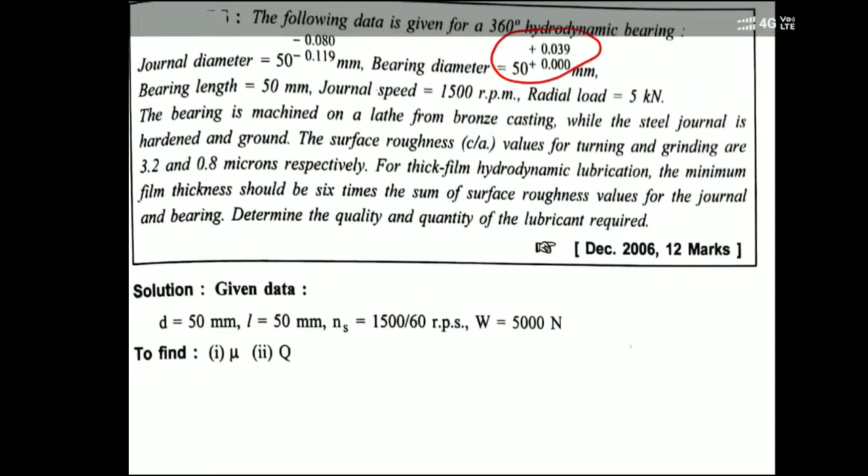First I need to find the radial clearance. Why? Because they have given the diameters of the bearing and of the journal. Capital D is for bearing, small d is for journal. I took the average of the upper and lower limit. For the bearing, upper limit 50 plus 0.039, plus 50 plus 0, the lower limit, divided by 2. This answer will be 50 point something.

Now the average diameter of the journal, that is shaft: 50 minus, you can see the upper limit is 0.080. I put it here and I'll get 49 point something. This diameter conversion is very important, because the clearance is nothing but capital R minus small r. R is not given; we have the diameters. You can convert the diameters to radii, or take D minus d divided by 2. It gives the radial clearance 0.059 mm. This is the first step.

Second, find the minimum oil film thickness. For thick film hydrodynamic lubrication, the minimum film thickness should be 6 times the surface roughness value. The two surface roughness values are 3.2 and 0.8. So h0 is equal to 6 times 3.2 plus 0.8, in microns. The answer is 24 microns, converted into mm by multiplying by 10 raised to minus 3.

We need h0 by C, because that parameter is indicated in the chart. C is known and h0 we have calculated, so here we are going to calculate the h0 by C term.

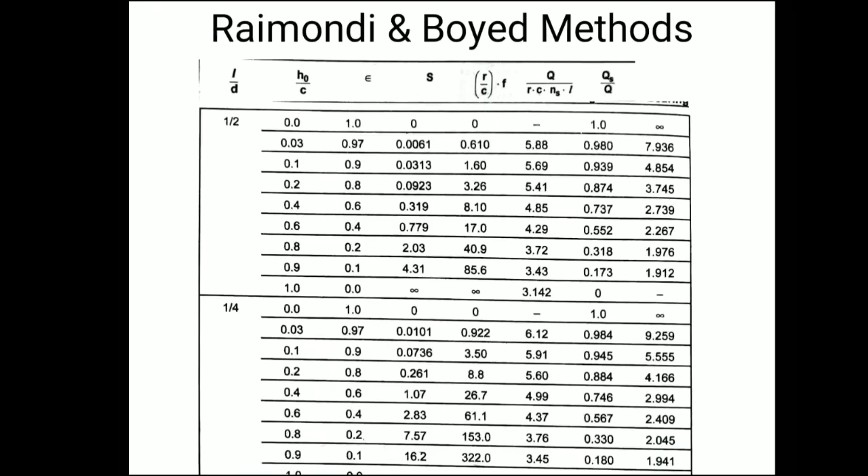Now you can get h0 by C: 24 into 10 raised to minus 3 divided by C, the clearance. It will give you 0.4, correct? 0.4. Go to the chart of the Raimondi and Boyd method. First of all, I must know the L by D ratio. So I will have to check the L by D ratio. It is 50, diameter is 50.

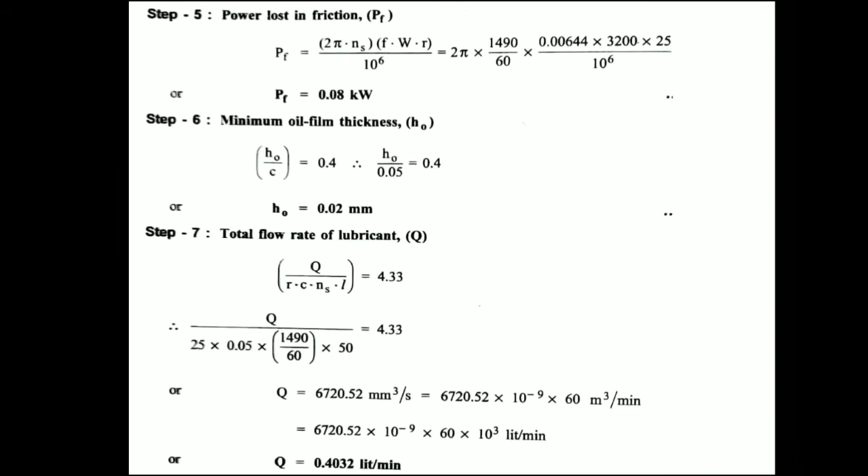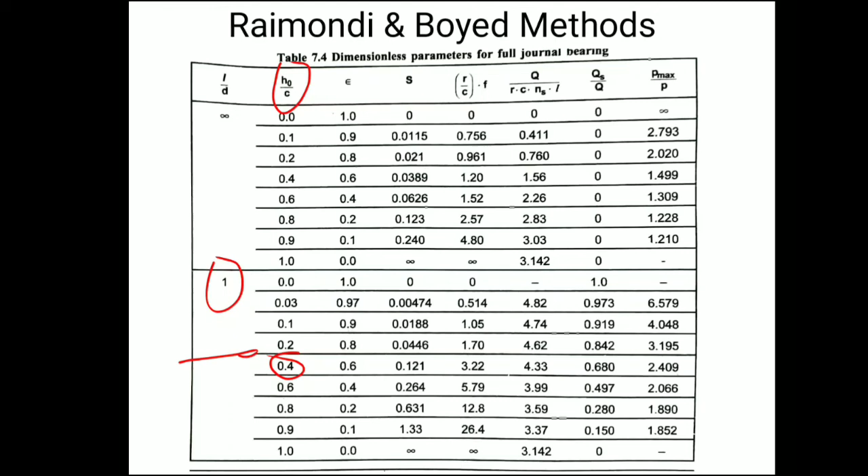I got the chart row which is required for solving the numerical. So this row you copy as it is. So I'll write here. Did you get it? Okay, see, I copied this row. L by D how much, h0 by C how much, bearing characteristic number, then the flow variable, pressure and flow rate. Correct? So that row I copied. So this selection is very important.

In the previous numerical, we selected this from the bearing characteristic number. But right now the given data is related to oil film thickness, so according to oil film thickness, I have chosen the row. Is that clear? So I'll use one by one what they are asking. They are interested in the quality of the lubricant, that is viscosity. So viscosity is in which parameter equation? Of course, the bearing characteristic, that is the Sommerfeld number. Here mu is there. Correct?

So I use S is equal to (R by C) square into mu NS by P. Correct? So mu is not known. But I can calculate pressure on projected area, that is P is equal to W divided by L into D. W, the radial load, is known, L into D known. So it will give you 2 newton per mm square. So I can put this value. S value will be the Sommerfeld number; you can check from the diagram. For 0.4, S value is 0.121.

So I took here 0.121 is equal to (R by C) square into mu into speed. I will have to take it in RPS, revolutions per second, divided by the pressure. This will be the 2. So from this I'll get the viscosity. It is in newton second per mm square. I know that if viscosity is in 10 raised to minus 9 terms, I can convert it to centipoise. So I told you the conversion. Therefore the viscosity is 54.83 centipoise. Is that clear? So this will be step number 5.

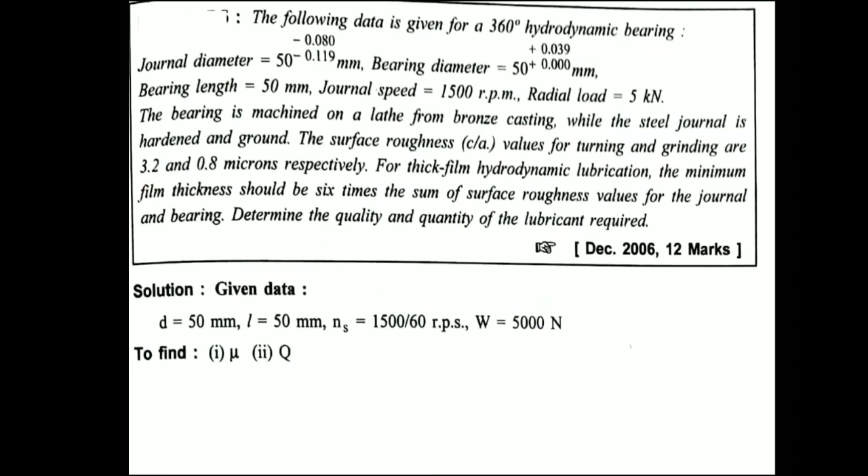Quantity. Now quantity is nothing but Q, the flow rate in liters per minute. So that we need to calculate. We know Q by RCNsL. Q is situated here. So Q by RCNsL is equal to 4.33. So I will have to mention here 4.33, and I put all the values which we have calculated. Here do remember that Ns should be in RPS.

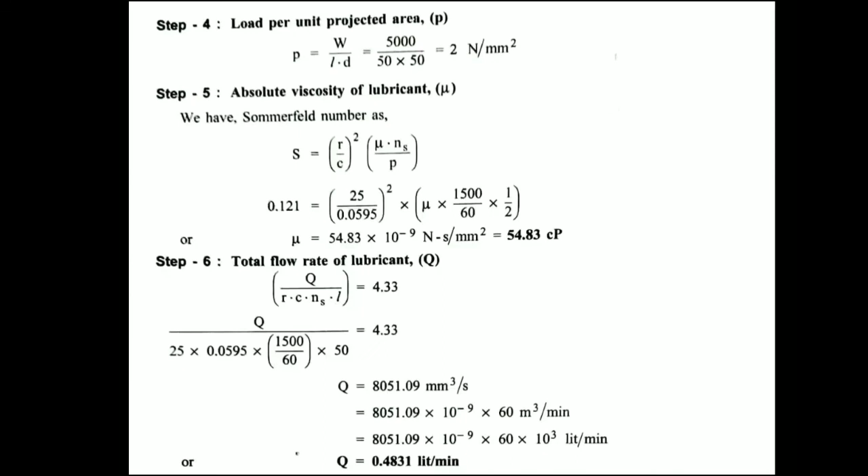Now Q value is in mm cube per second. I told you how to convert to liters per minute. By the same method I'll convert this, and I'll get 0.4831 liter per minute. So as per their requirement we have calculated 2 data: one is the quality and the second one is the quantity. Clear friends? Such kind of example will be asked in the exam for 12 marks.

You have to do the practice from your side. Now this will be your homework. Just take a screenshot, do the homework stepwise and submit it to me. In the assignment also I'll add this numerical, so try to solve it.